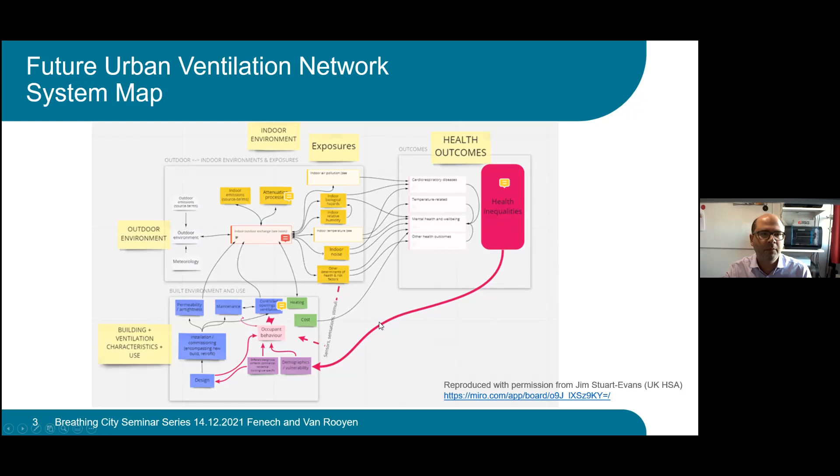And then I'm going to focus on how sound and noise, both outdoor and indoor, fit within the indoor and outdoor environments. And then Cairan will talk about how ventilation, building ventilation characteristics, link into the outdoor and indoor sound problem. And along the way we'll bring up issues of health inequalities in terms of demographics and vulnerability. So over to Cairan to give a brief overview of indoor environmental quality and health.

Great, thanks, Ben. Hi, everyone. Just going to get this out of the way.

So Europeans spend most of our time indoors. Some parts of the population spend almost all of their time indoors. And during the COVID pandemic and national lockdowns, large populations have been spending almost all of our time indoors and most of our time at home. The indoor environment is comprised of four component parts: thermal, acoustic, visual, and air quality. Whilst we spend time indoors, we are exposed to these components, and these components have the potential to affect our health and well-being. First, I'll discuss the thermal environment, where exposure to high and low temperatures can affect our health.

Low temperatures affect the human body's cardiovascular and respiratory systems and can lead to death in humans. There were an estimated 41,000 excess winter deaths in the UK during 2014, and these are expected to reduce by 2% by 2050 due to the effects of climate change. Exposure to high temperatures can cause heat stress, heat strain, and heat stroke. There were an estimated 2,000 deaths due to high temperatures in the UK during 2014, and these are estimated to rise by 257% by 2050, again due to the effects of climate change.

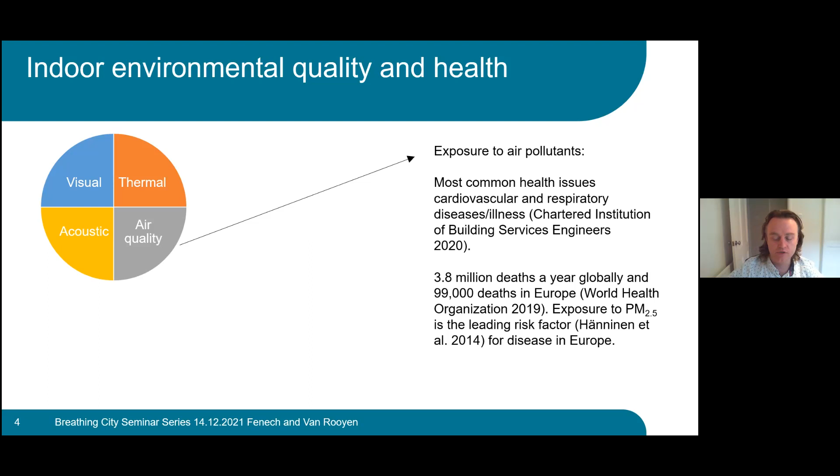There are an estimated 3.8 million deaths every year around the world due to indoor pollutants, 99,000 of which are in Europe, and exposure to particulate matter is the leading risk factor for disease in Europe. Exposure to noise can affect health and well-being in many different and complex ways. I'm going to pass over to Ben now, who's going to discuss the links between noise and health in some more detail.

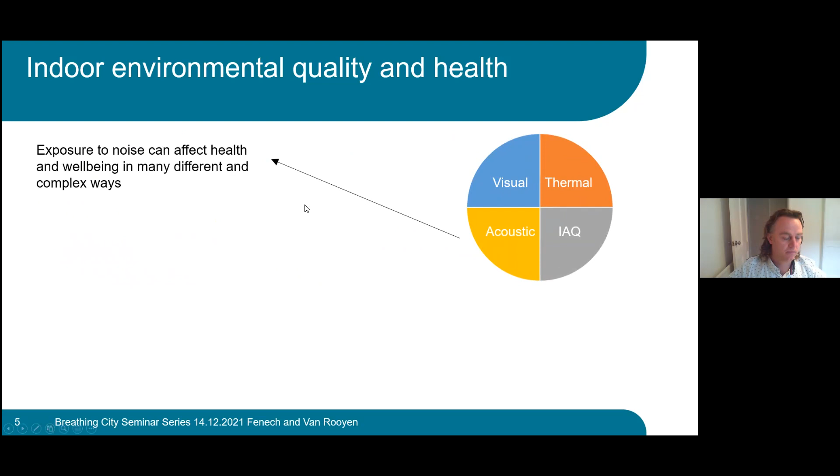Thanks, Cairan. So yeah, the focus of this session is on sound and noise, so I'm going to spend a little bit more detail on this specific aspect. So how does sound impact health? We have a number of pathways. The first one is a sort of direct pathway, autonomous physiological reactions. So these are your body's reactions to sound without you being aware of it.

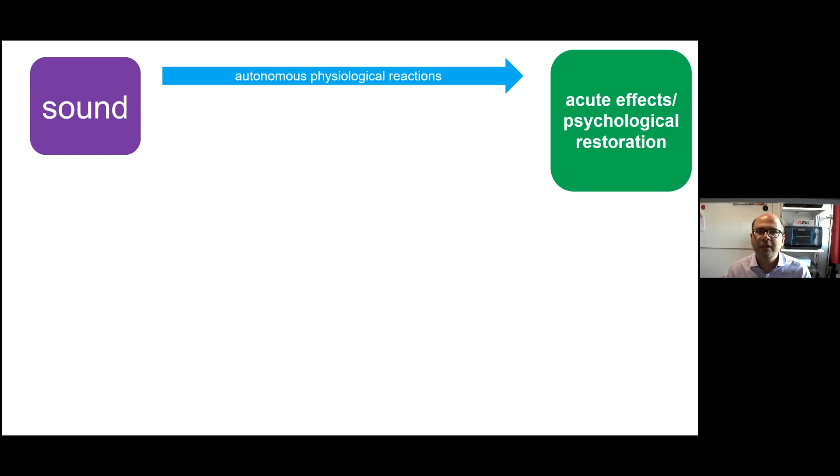It's predominantly at night in the form of sleep disturbance, and I'll talk a bit more on that in a minute. There's another pathway, keeping in mind that sound is a sense. We hear, we perceive sound, and it has meaning.

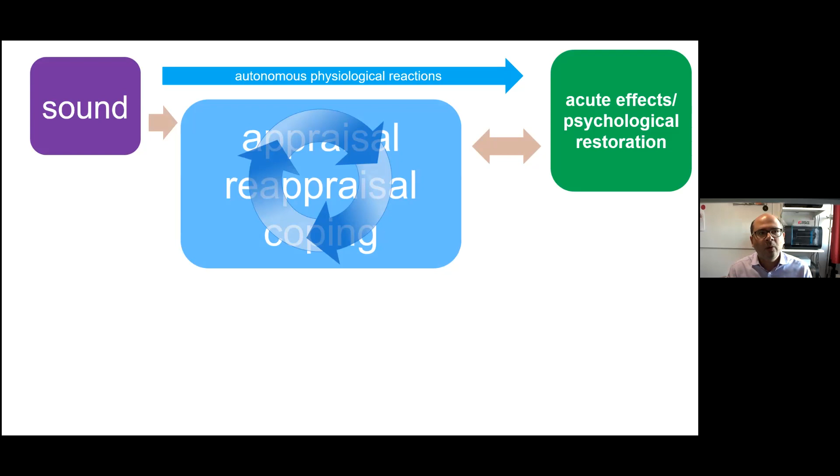So if sound is perceived as positive, it can lead to psychological restoration. Think about, for example, a nice green space, quiet place. If the sound is perceived in a negative way, then according to the transactional stress model, you have this constant cycle of appraisal, reappraisal, coping sort of in your head about, do you appraise the sound in a negative way, what sort of coping mechanisms you have to deal with it, and then you do a reappraisal.

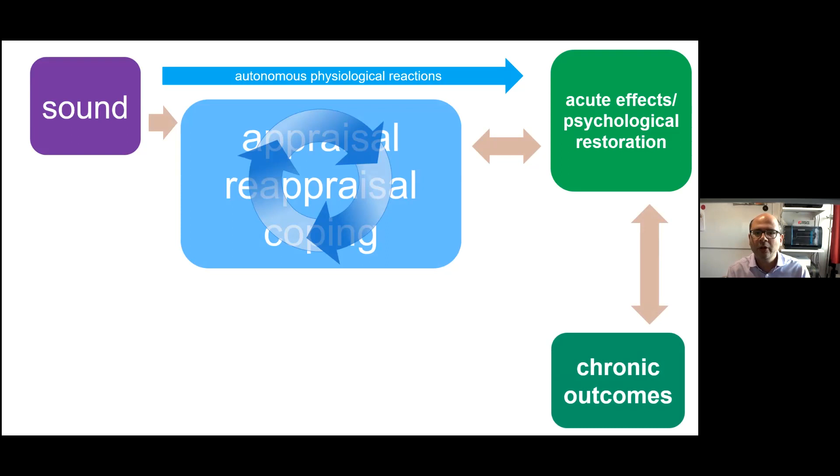And we know that if you have acute effects on health over a long period, those can translate into chronic outcomes. There's another kind of, you could say, complication or another mechanism, which is influence on behaviors. So the sound environment outside your home might influence how likely you are, for example, to go out for a jog or to go out to visit a green space. Or more relevant perhaps to this network, it could influence your ventilation practices.

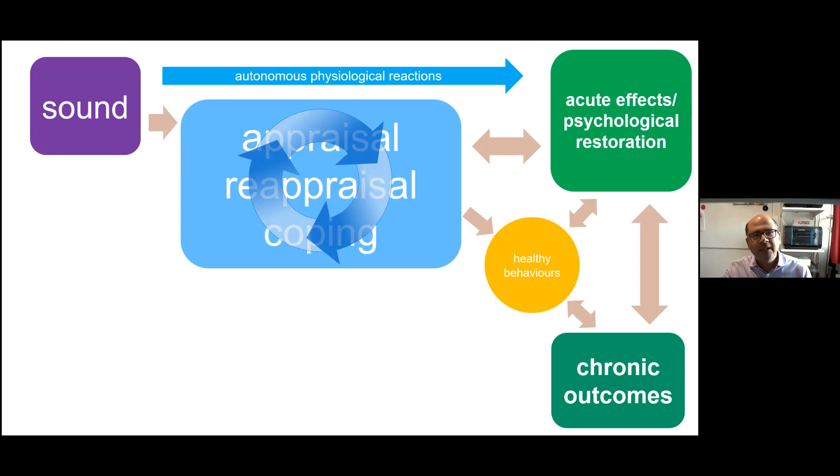And then I can't talk about sound and health without referencing non-acoustic factors. These are contextual factors where it's nothing to do with the dBs or the sound level itself. It's the context in which the sound is happening, for example, time of day. And you may be wondering how we know all this.

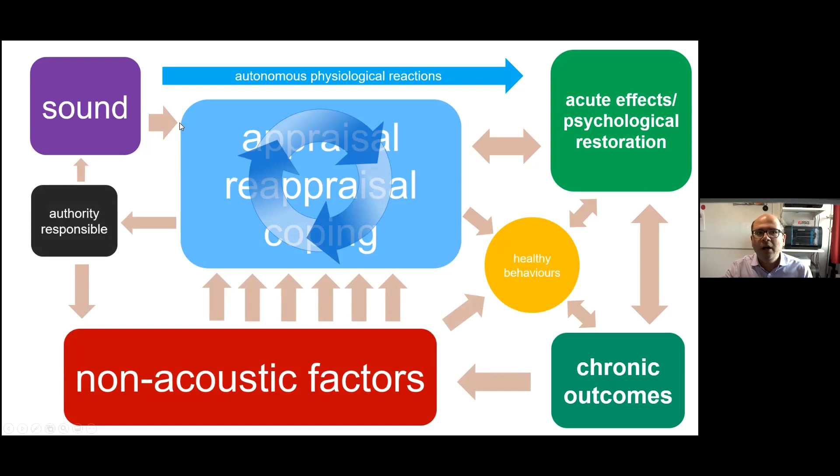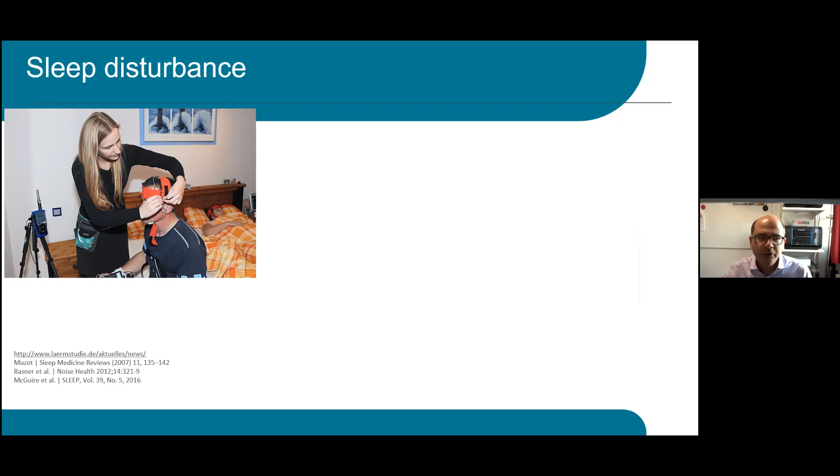So if we look at sleep disturbance, in the past 20 years, we've had some very good quality studies where they measure sleep disturbance in people's homes, not in labs, using polysomnography, which is considered the gold standard of how you measure sleep disturbance. And that involves measuring brain activity, eye movement, and muscle tone. And what you get from that is what's called the hypnogram.

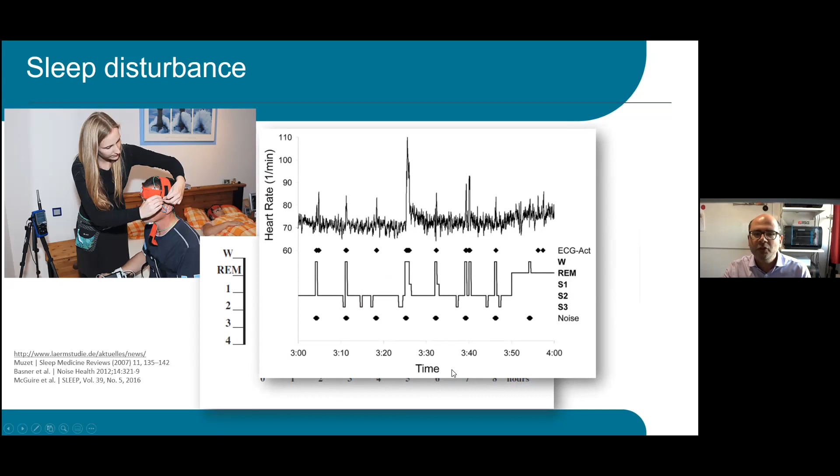So what happens when you introduce noise? So this is an hour during the night from 3 to 4 o'clock. The diamonds are noise events, in this case, aircraft flyovers. And you will see that in the hypnogram, which is above that, this person was in light sleep. A noise event took place. It took them momentarily to awake and then back to light sleep.

Then they went to deep sleep, but right at that moment, there was another noise event which took them to wake. And then more importantly, they didn't go back to deep sleep. They went to light sleep. And then for the third noise event, you will see that there's no reaction. And that's quite important. Not every single noise event wakes you up. So this process continues, and it's called sleep fragmentation. On the top, you will also see that from a cardiac perspective, there's always a momentary increase in heart rate for every single noise event.

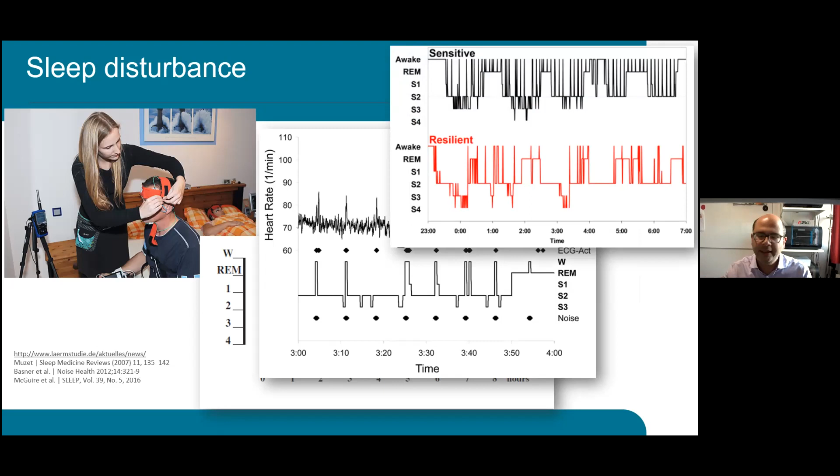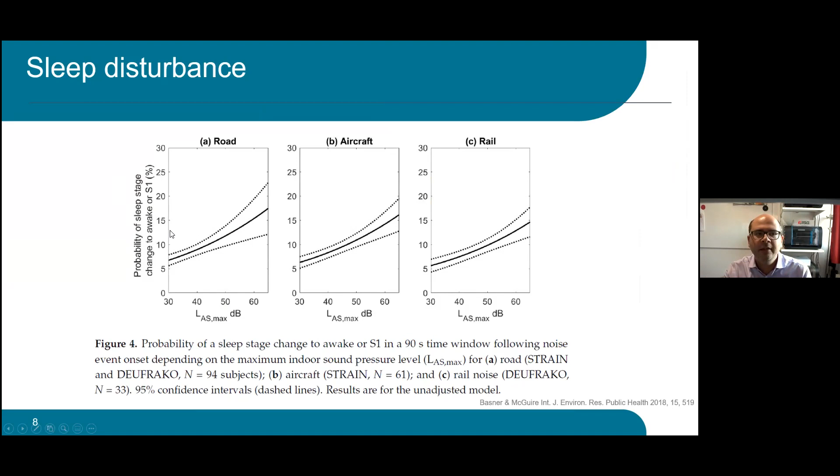And what do we do with all this information? We use them in terms of exposure response relationships, where you can get the probability that a noise event leads to an awakening based on the noise level. But the important thing is this is one of the very few health outcomes which are related to an indoor level as opposed to outdoors. So these graphs are in terms of the maximum indoor sound pressure level.

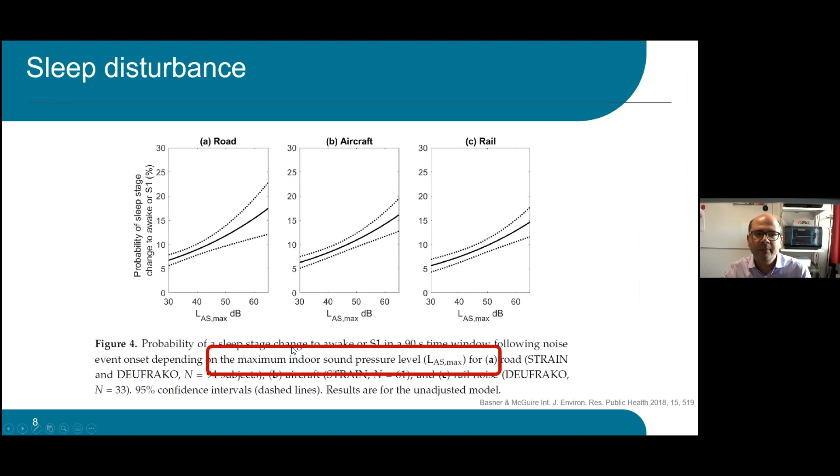In terms of the other pathway, so we discussed this, the indirect pathway, we have noise. So you're sitting at home, you came back home after a stressful day of work, you're trying to relax, but noise from outside is disturbing your activities. That leads to a cognitive and emotional response. And the way your body deals with that is by the release of stress hormones. And over time, that could trigger increases in blood pressure, blood viscosity, etc., which are known risk factors for cardiometabolic diseases.

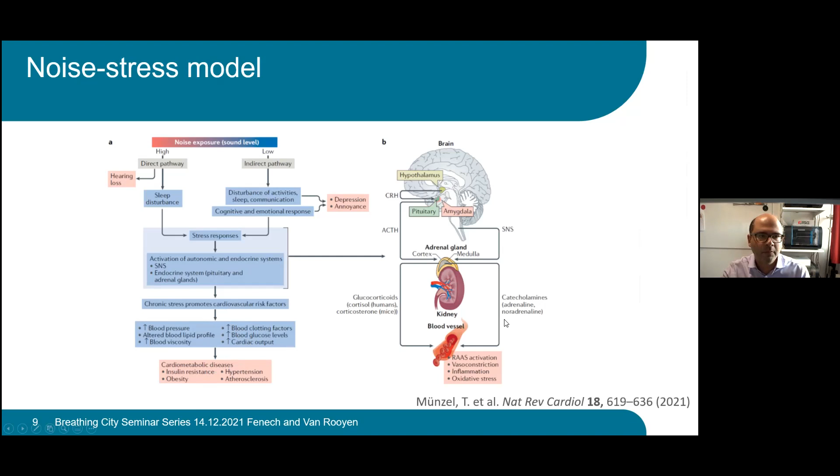And if you're interested in this area, I really recommend this review published this year by Thomas Münzel, which gives quite a comprehensive summary of the mechanistic evidence we have to date on this. If we look at epidemiological evidence, hopefully some of you will be aware that the WHO Europe published updated guidelines in 2018, which is quite a useful summary of the evidence.

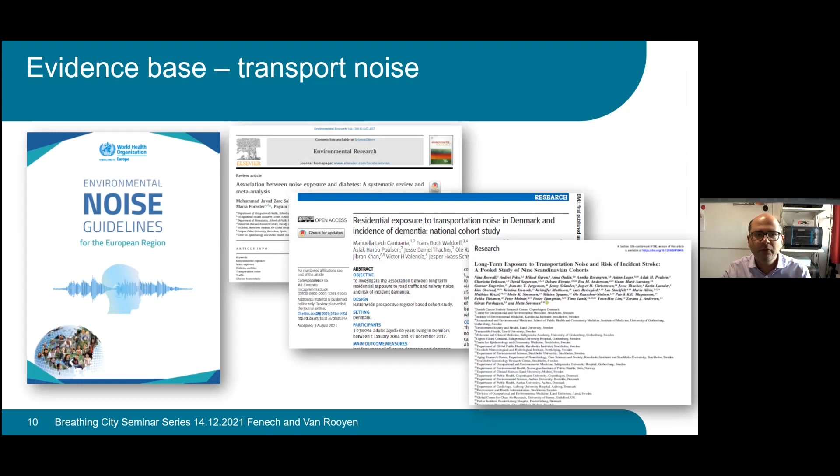But for those of you who are familiar with systematic reviews, they take time to produce. So guidelines published in 2018, they are based on evidence up to roughly 2015. So now we have 7 years of newer evidence, which is not captured in those guidelines. And I've just included 3 here, which are either systematic reviews or good quality studies showing links with diabetes, with dementia, and with stroke.

And if we look at how this evidence gives us useful information, we have relative risks expressed in terms of a long-term noise average, LDEN, which is a 24-hour composite metric based normally on annual average traffic flows. And more importantly, this is noise outside the dwelling. So the question then arises, if you have 2 dwellings, one of them with very good triple glazing and good quality, quiet mechanical ventilation, and the next door is relying on natural ventilation, the dose inside will be very different. So that could be clouding the results a bit.

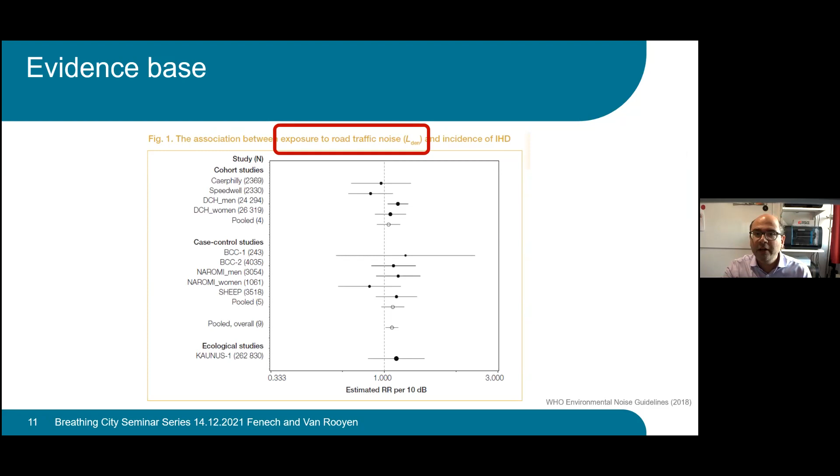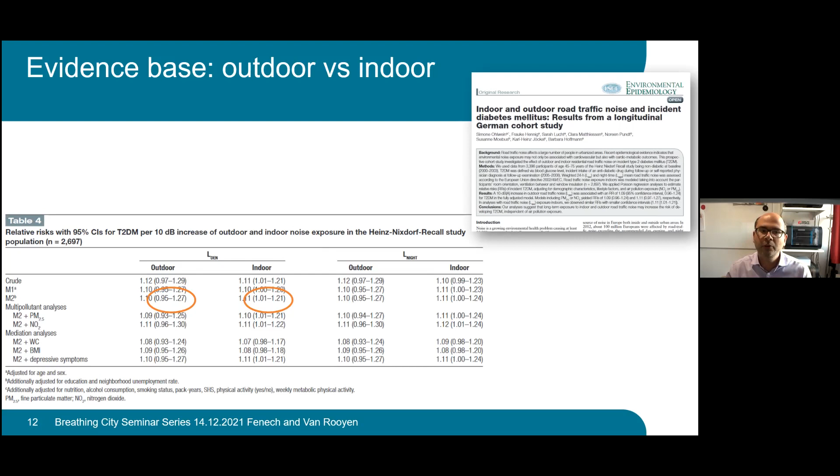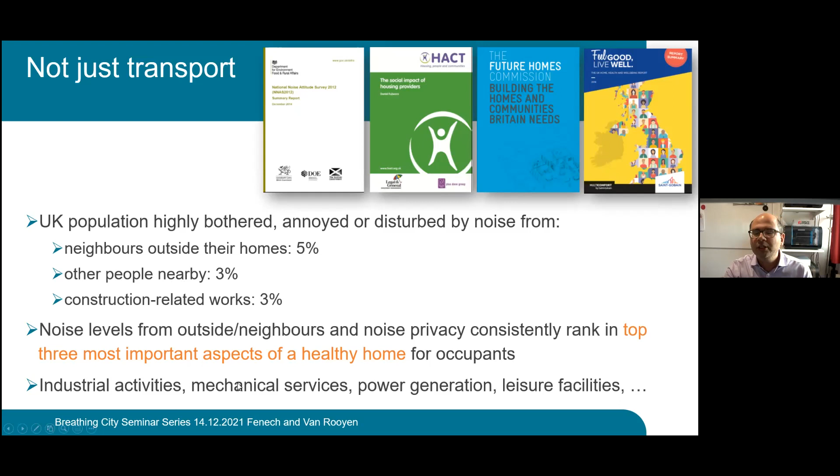That evidence is primarily based on transport noise sources, but as we know, there's other sources of noise. Neighbors is an important one. We often think of neighbor noise as coming through the walls, but neighbor noise can come from outside. Construction, industrial activities, mechanical services, power generation, leisure facilities, etc. And of course, if we're talking about noise sources, I can't not mention Maurice, France's most famous rooster. Just a reminder that it's not always that rural is quiet and urban is noisy.

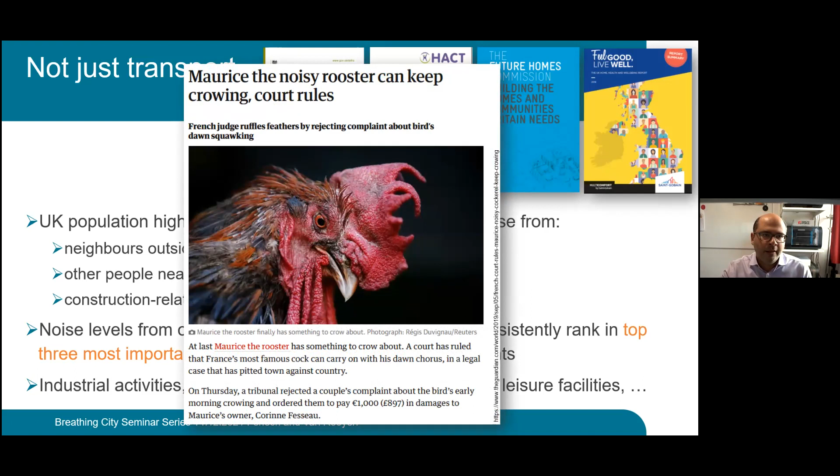And so we can talk a lot about noise and sound, but the purpose of this session is people don't have only sound in their lives. So if you consider a dwelling, yes, you may have railway or a road outside your dwelling, but you also have sources of overheating, you have sources of indoor air quality, and that's how people live in everyday life. And then we need to bring in climate change, which Cairan already mentioned.

And climate change and climate change adaptation is important in this context for two reasons. We're seeing new sources of sound or noise. For example, for power, we have onshore wind, and for heating and cooling, we have heat pumps. But also climate change adaptation is changing the way we insulate our homes and the way we ventilate our homes. And Cairan is now going to take over to look specifically at the relationship between ventilation and indoor environmental quality.

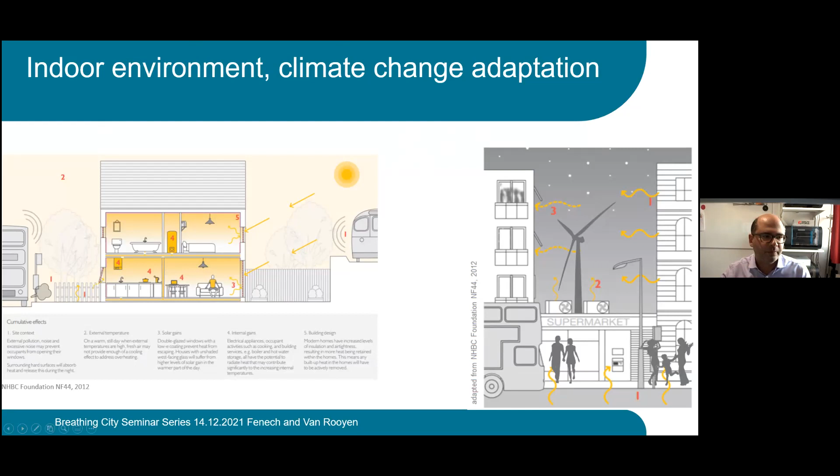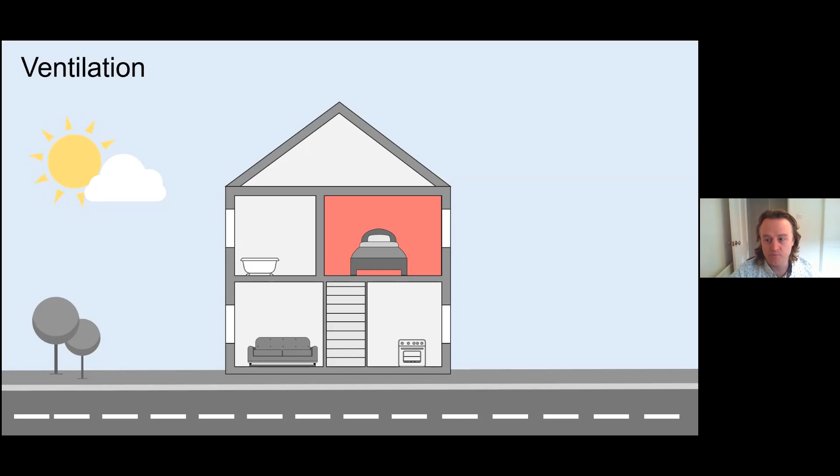So ventilation by opening windows is the main way for occupants in Europe to impact or change their indoor environment. Ventilating can improve, but it can also worsen the indoor environment, and our exposure to high or low temperatures, different pollutants, and indeed noise, as Ben's just been talking about. Ventilation modifies our exposure to these pollutants, and so ventilation can have an indirect impact on health.

Ventilation can be defined as the removal of stale, polluted, or warm air from inside and replacing this with fresh, unpolluted, or cooler air from outside. In the UK and in Europe, natural ventilation is the dominant form of ventilation, and that's where we have trickle vents, extract fans in our bathrooms and kitchens, and by opening windows. Next, I'll introduce the relationship between ventilation, overheating, indoor air quality, and noise.

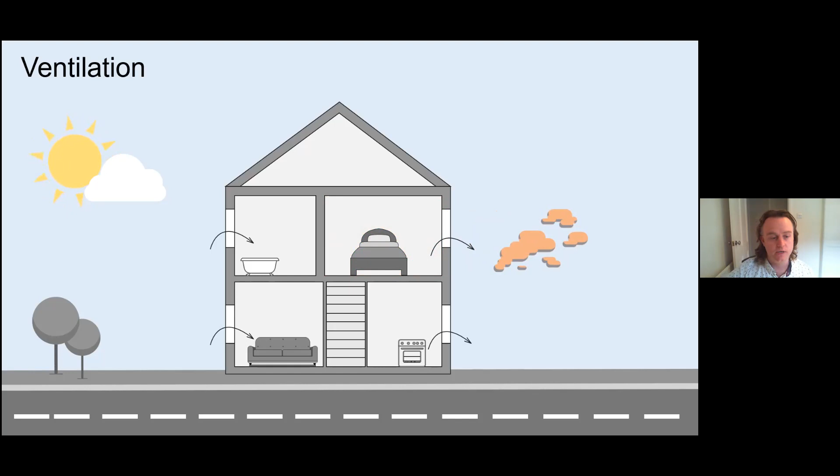So there is general agreement between the theory, modeling studies, and the limited empirical research considering the relationship between ventilation and overheating. These studies generally show that when the outdoor air temperature is lower than the indoor temperature, higher air exchange rates will reduce the indoor temperature and reduce the risk of overheating. Not all empirical research has found this relationship, as it is often difficult to disentangle the cause and effect of overheating.

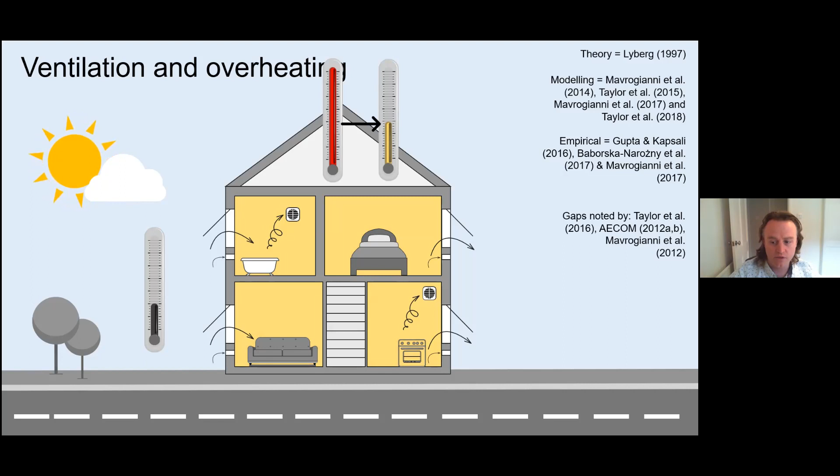There's limited empirical research considering overheating in the UK, and a lack of research considering the relationship between occupant behaviour and building overheating. The current empirical research lacks measurements of air exchange rates, has small sample sizes, and lacks measurements of other aspects of indoor environmental quality. Furthermore, overheating is typically considered in isolation of the other aspects of the indoor environment.

Conlon and Harvie-Clark illustrated a real-life example of where facade sound insulation was considered separately from the provisions for ventilation and mitigating overheating. It's a really interesting piece of work, which I urge you to have a look at if you're not aware of it.

They reviewed 160 major planning applications in London and found of those 85% of the planning noise assessments assumed closed windows, and the overheating assessment assumed openable windows. This leaves the occupants with a choice between thermal comfort or reasonable indoor noise, but not both. With urbanization, the urban heat island effect, more airtight buildings, and the changing climate, this problem is likely to worsen.

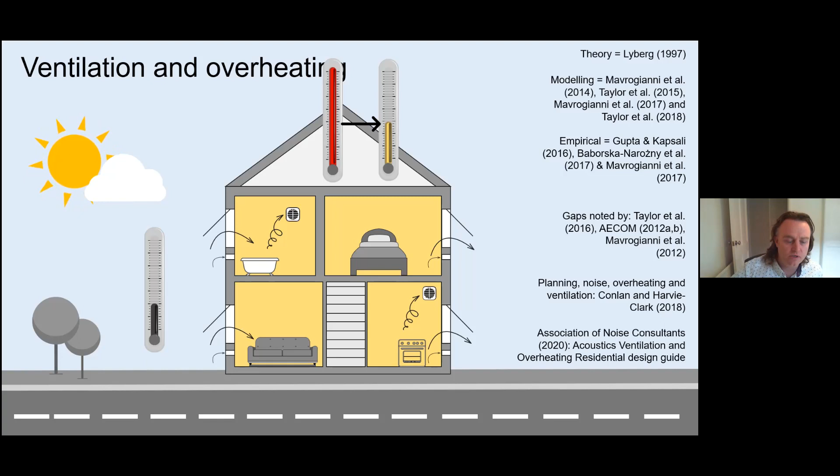The Association of Noise Consultants has produced the Acoustics, Ventilation and Overheating Residential Design Guide. It's a bit of a mouthful, but it's referred to as the AVO guide. This guide recommends an approach to acoustic assessment that takes regard of these interdependent factors. I've put a reference up on the slide for you to have a look at.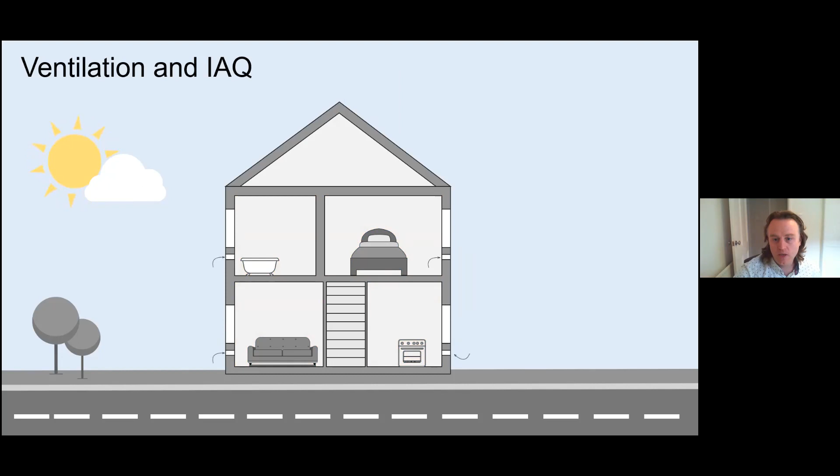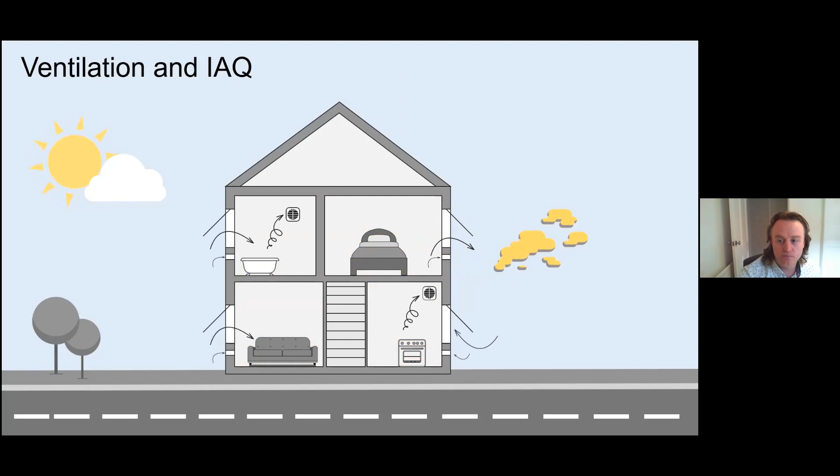The literature describes that when there's an air exchange set up between indoors and outdoors, for example, when opening windows or operating ventilation systems, indoor concentrations of pollutants from indoor sources, such as carbon dioxide and volatile organic compounds, will be reduced by dilution or removal. However, indoor concentrations of outdoor pollutants, such as particulate matter and nitrogen dioxide, will increase.

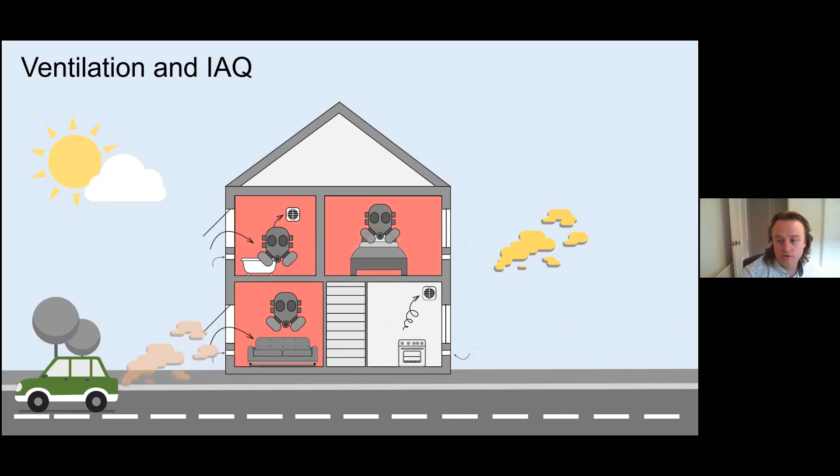Conversely, occupants might not want to open their windows due to outdoor noise, as we've talked about, air pollution, security, or for many other reasons. In this case, low air exchange rates will result in higher concentrations of pollutants from indoor sources and lower concentrations of pollutants from outdoor sources. Closing the windows can also cause overheating, as previously discussed.

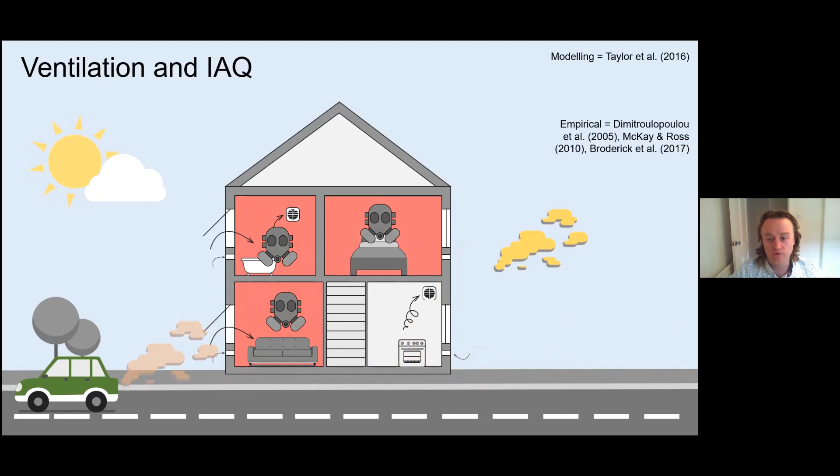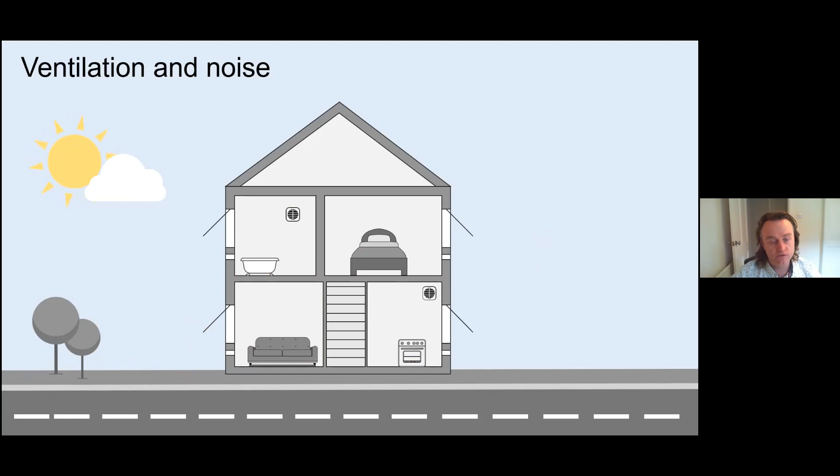Noise can be generated by ventilation equipment itself. And this is a common reason for occupants disabling, blocking, or turning ventilation systems off. Turning off purpose-provided ventilation systems can compromise the thermal and air quality of the indoor environment, which can allow temperatures and pollutants from indoor sources to rise to potentially dangerous levels.

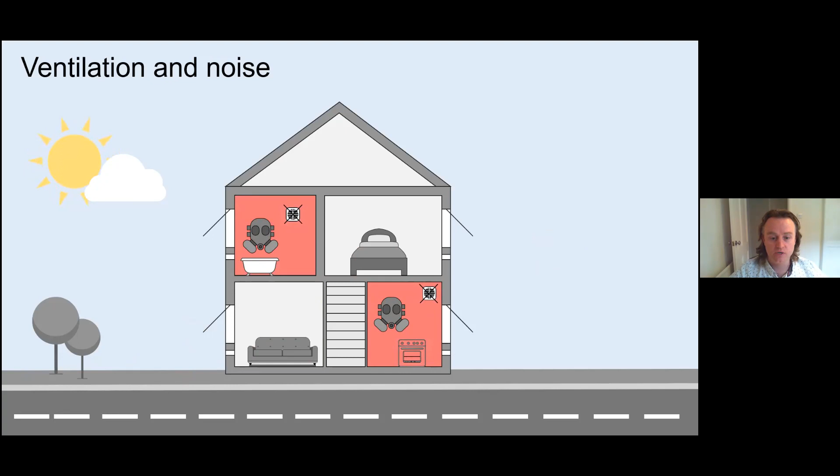Outdoor environmental noise is regularly cited as a barrier to occupants opening the windows in pursuit of improving indoor air quality or reducing overheating. This is shown through a really interesting and large research project by Andersen et al., where he studied 933 participants and found environmental noise to be a significant predictor of when the window was open.

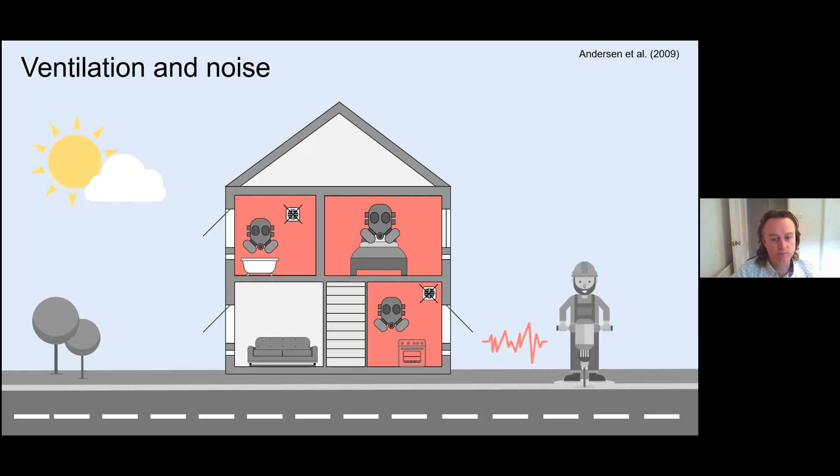They also found that in dwellings which perceived the indoor air quality as bad, more windows were open in dwellings that perceived the environmental noise as quiet. This is important as it shows that despite perceived poor indoor air quality, occupants did not have open windows, which could be because they perceived the outdoor environment as noisy.

To wrap this up, most of the literature reports that occupant behaviour is one of the most important factors for ventilation, air exchange rates, and overall indoor environmental quality. Another really interesting piece of research by Bekö et al. looked at 500 Danish bedrooms and constructed different regression models.

The takeaway from this research is they found that occupant behaviour was a far stronger predictor of ventilation rate than building characteristics alone. The authors, as I mentioned, built different regression models with building characteristics and behavioural variables, and found that the behavioral model was able to describe 30% of variation in air exchange rates and the building characteristics, only 9%.

The reasons why people open the windows and the barriers to opening the windows are vast, and research frequently describes that ventilation behavior is very different between people. Some people ventilate when carrying out a specific activity, such as showering or cooking, others at specific times of the day. Others react to their perception of temperature or air quality.

Ventilation is also shown to be influenced by the type or use of the room that the occupant's in, the building design, occupants' knowledge of ventilation, occupants' knowledge of their own ventilation systems and how to work them, noise from the ventilation system, noise outdoors, security, outdoor air quality, household size, occupant age, and there are more. This large number of driving factors and barriers make ventilation research complex and challenging.

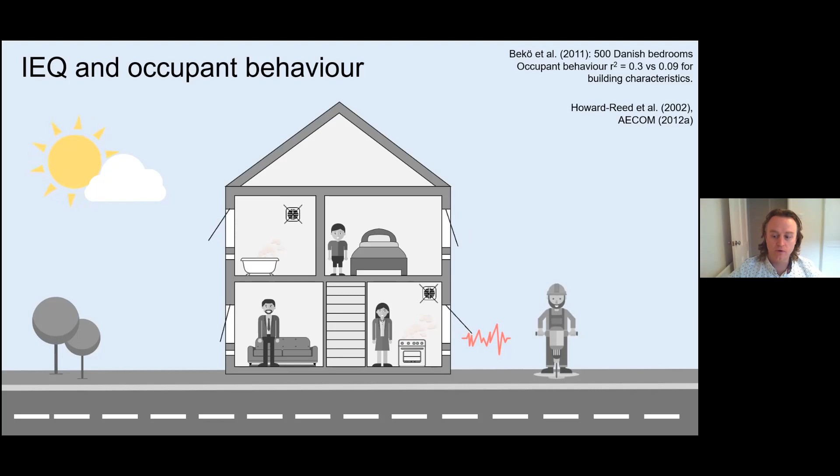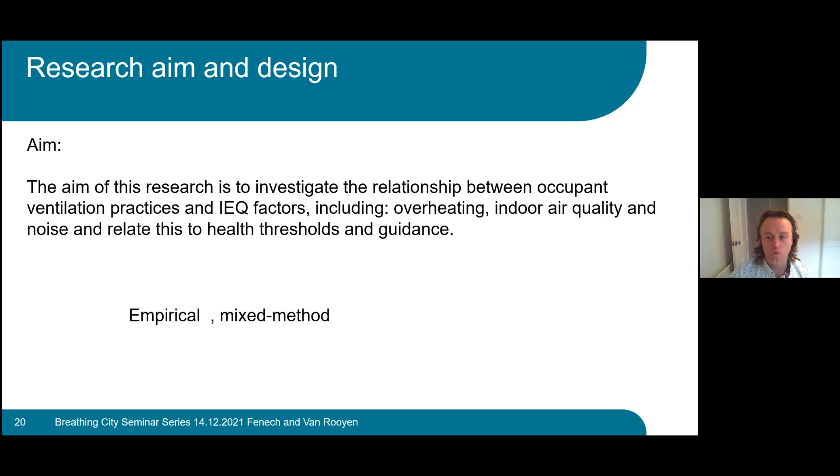It will be using mixed methods, so collecting both quantitative physical measurements of indoor environmental quality and qualitative social data on the household and their ventilation practices. A mixed methods approach is important as buildings are complex socio-technical systems, and much of the behavior we're interested in is enacted by the occupants. So it's important to collect qualitative social data from the occupants. Finally, I'll be studying this phenomenon using a multi-case study approach where the complex interaction of all the factors we've been talking about can be carefully explored.

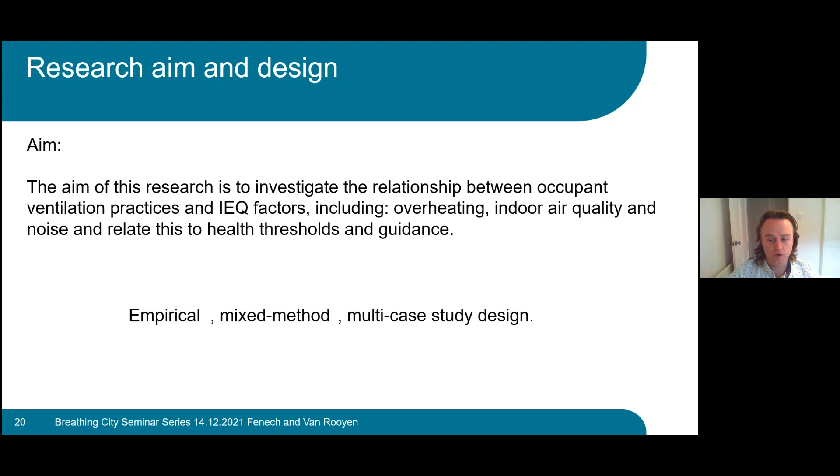So, how am I doing this? This research uses a range of specialist equipment for collecting data on indoor environmental quality from 7 case study dwellings in the UK. Measurements of temperature, humidity, carbon monoxide, carbon dioxide, nitrogen dioxide, PM1, PM2.5, PM10, total VOCs, noise, and window and door events throughout each case study are also being recorded. This results in a large complex data set with high temporal and spatial resolution.

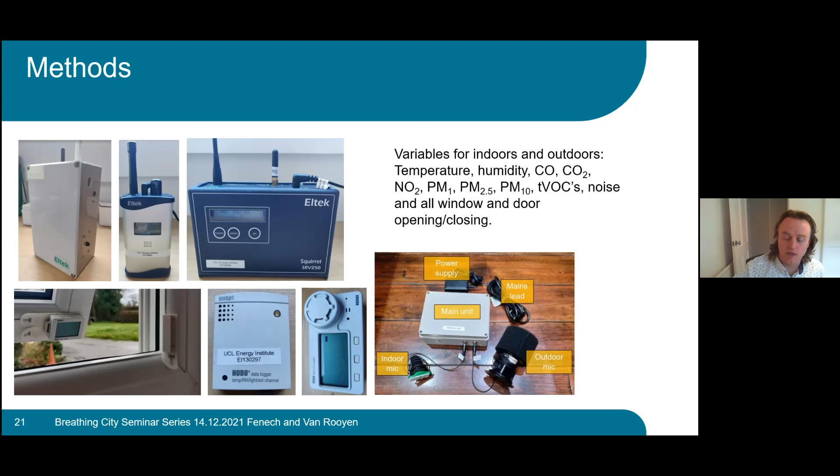It can be easily installed by the participants themselves. Importantly, the outdoor microphone can be installed irrespective of what floor they live on. With some of this specialist off-the-shelf equipment, it's not very easy to locate outdoor microphones. But in this case, we developed an outdoor microphone with a little sucker cup, so it can be easily installed on any floor. And finally, and very importantly, it gives very careful consideration to ethical and privacy concerns around collecting this type of data.

One major limitation of using event sensors for detecting whether a window or door is open or closed is they do not easily allow for ajar positions to be measured. The sensors themselves can be expensive, they can be intrusive, and I have had numerous problems using these in real dwellings. So this led us to develop a new method for inferring window positions, so open, closed, but most importantly also the ajar position, from sound measurements taken inside and outside of a window and door. We've tested this method in 2 very different case studies, and the method is achieving very high accuracies.

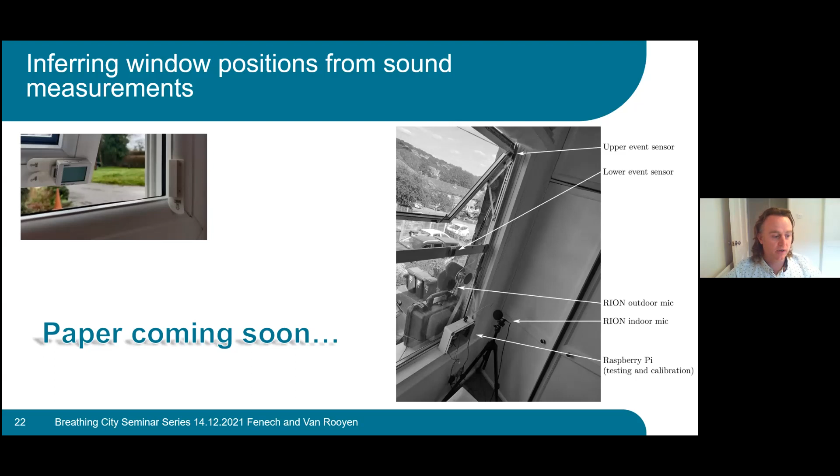So COVID and its implications on the monitoring work. COVID presented quite a unique challenge to the monitoring campaign, particularly with the amount of equipment that we use. So where normally I would install and manage the complex equipment myself, the pandemic and lockdowns meant that this was not possible. And so I had to redesign the monitoring campaign.

So we initiated and managed the whole monitoring campaign across all 7 case study dwellings entirely remotely, using the postal system and modern communications apps to talk through installation, fault finding, and fixing any problems. As you can imagine, remote campaigns came with loads of different challenges, not least using non-experts to install highly specialized equipment. Some important lessons we learned were around the importance of communication, supporting the participants, and really simplifying the installation and management of the equipment as much as we possibly could.

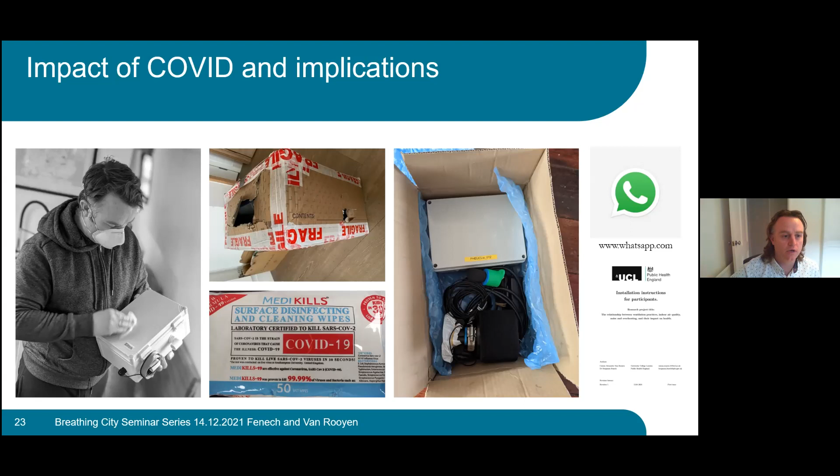So we hope our experiences from carrying out a really complex and thorough monitoring campaign entirely remotely can be used to facilitate future campaigns of this type. I find this really exciting, as I think the lessons that we've learned from carrying out this type of remote work and the rapidly reducing cost of equipment, the evolution of the Internet of Things could unlock larger campaigns with larger sample sizes and possibly lower overall costs. So unlocking a whole new horizon of research in this area.

So I'm just going to talk very briefly about some of the analysis that we're carrying out. It uses 3 novel analysis strategies to disentangle the complex relationship between ventilation and IEQ. The end result is relating ventilation as a practice to each component of indoor environmental quality together. This is work in progress, and for that reason, I can't give you lots of details, but I hope to again return later next year, if possible, to share more about these strategies and some of the initial results.

The results of the research can be used to support other evidence for policy change and for reducing uncertainty in modelling work. It can be used to provide public health guidance on ventilation, with the ultimate aim of reducing their exposure to pollutants, reducing healthcare costs, and the impact on society as a whole.

Sorry, I've lost my mute. I lost my mute, but I do apologize.

So yes, that brings us to the end of the presentation. I'm just going to summarize into 4 take-home messages. And the first one is, if indoor environmental quality was a big jigsaw, hopefully we've convinced you that noise is a key piece. It's a key piece both because of the noise and sound affecting health, but also in terms of noise as a behavioral modifier for ventilation practices, which will have a knock-on effect on other aspects of indoor environmental quality.

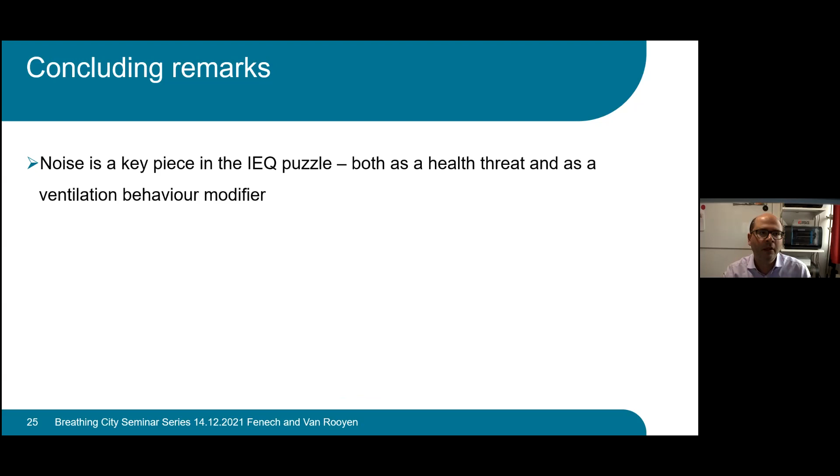The second one is linking to the occupant. So as Cairan has mentioned, the occupant behaviour has a much more significant influence on ventilation than building characteristics. So we think it's really important that we start bridging the gap between building performance design intent and building performance in use.

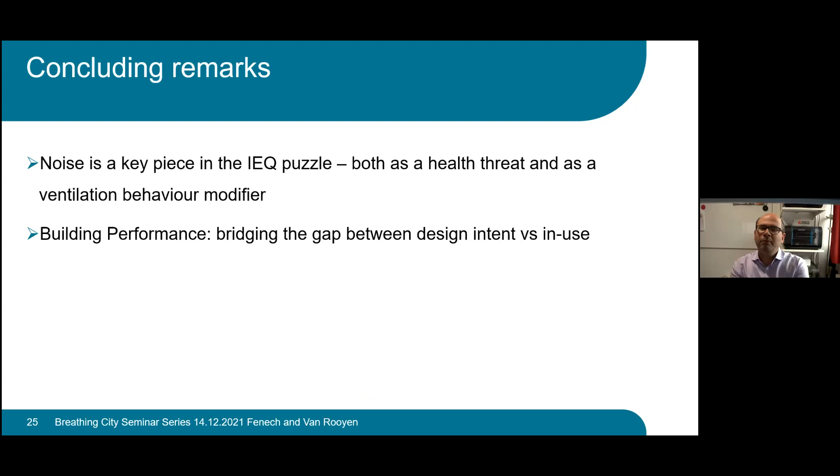The third point is, unfortunately, due to time, I talked a lot about noise. I didn't talk much about sound, and sound can have positive health benefits. And there's an increasing amount of research focus on the practice of soundscapes. And if we try to apply that to what we discussed today, could we envisage a situation where we can design the outdoor sound environment to promote healthy ventilation behavior, where the sound environment outside your dwelling really encourages you to open your window to let the nice sounds in, but you're ventilating your dwelling at the same time.

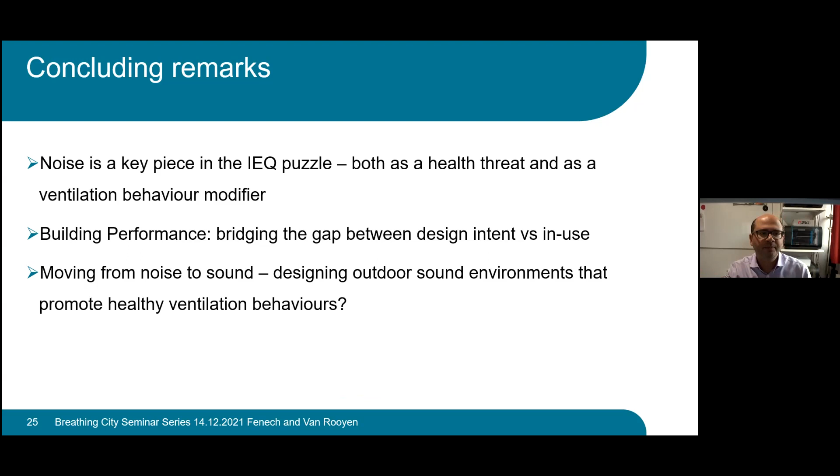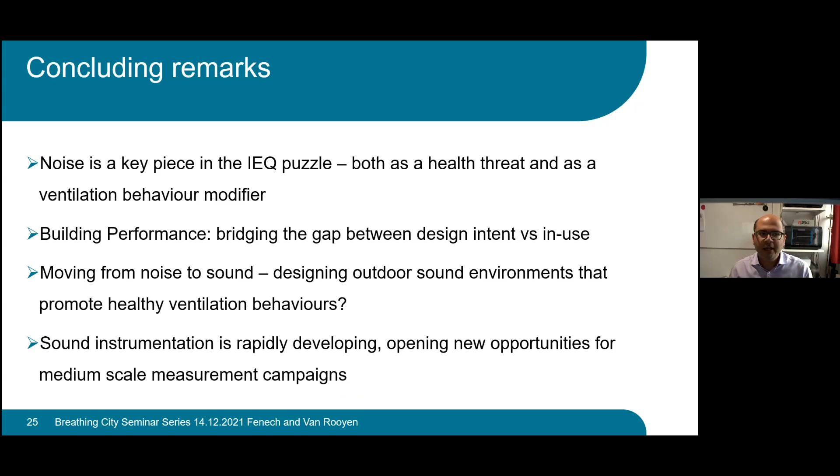And the final point, also made by Cairan, is that instrumentation is rapidly developing. With sound here because of the focus of the talk, but this applies really to the broader picture. So with Internet of Things, with smart sensors, it's really opening new opportunities where we can look in more detail into complex problems like we have here with indoor environmental quality and occupant behaviors. We hope you found this session interesting, and we'll be more than happy to take any questions.

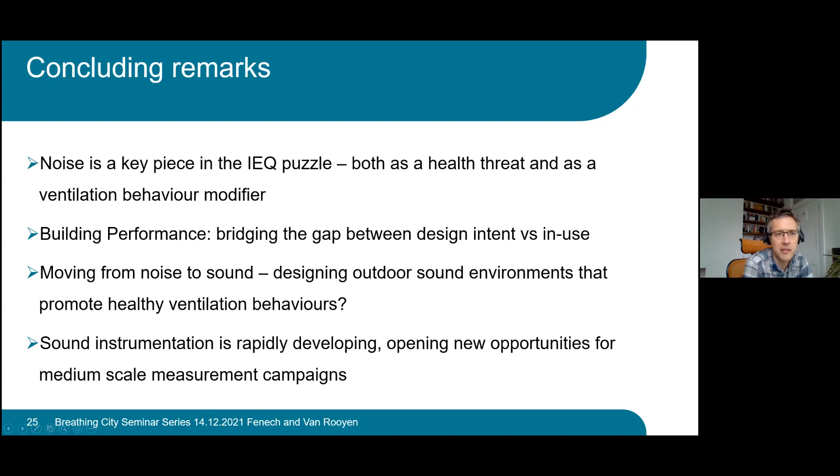Thanks, Ben, and thanks, Cairan. That's excellent. It's hard to know where to start to pick up on some of these points. You've certainly convinced me of the merits of looking at noise in more detail and in a more integrated way. And with your research, Cairan, it's really impressive to see what's coming out of it already in terms of things that can be applied usefully elsewhere. Whilst people perhaps think about any questions they have and drop them into the chat for you both, I guess taking a step back, thinking about the bigger picture in terms of indoor environmental quality and health.

Maybe this is unfair, but my sense is that noise is often recognised as a relevant factor, but the discussion might be more typically dominated by discussions of ventilation in the context of air quality. And I know this is a big question to ask, and potentially something that could take a very long time to answer.

But if that premise is true, how could we potentially better address noise and indoor air quality and other factors together as determinants of health, rather than this separate approach that you've brought up? And are there any quick wins or easy wins that you can see, either from your position, Ben, or maybe in a more applied way in your research, Cairan?

If I go first, Cairan, and then feel free to join in. So yeah, thank you very much, Jim. That's a very, very good question.